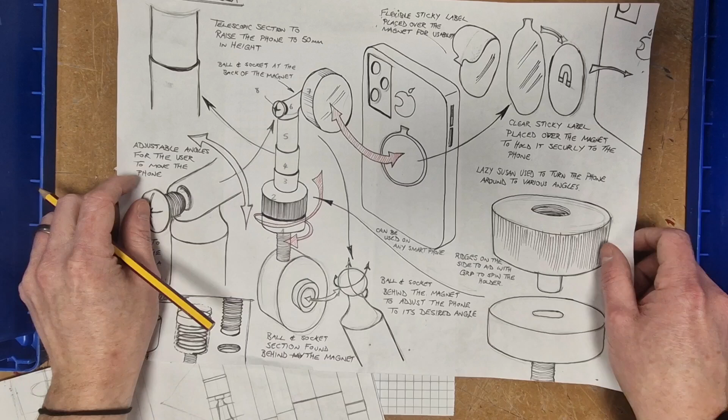It is a plan of what you are going to make, and it is done to a certain scale. The scale that we're going to be using is 1:1, which means that every 1 centimetre or 1 millimetre means 1 centimetre or 1 millimetre in real life. So for example, in year 10 and 11, we have been tasked with designing a phone holder that attaches to a rig. So here is a design of one of those phone holders.

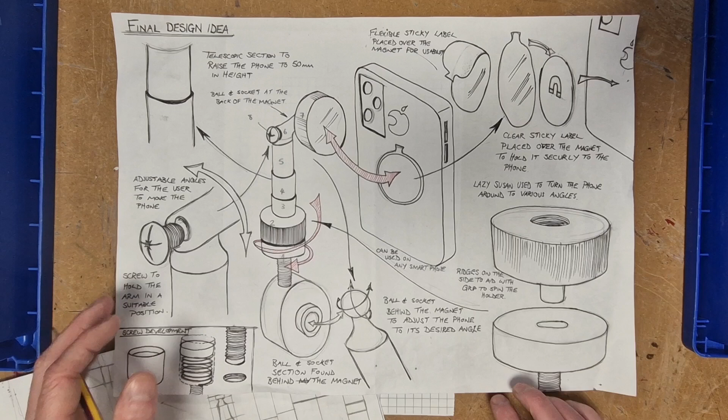So as you can see, here is the 3D. This is just a concept showing you exactly how it works. Now this is in isometric. So a 3D object, you can see absolutely everything, the front, the side, the back, and so on. Now an orthographic is a 3D sketch in a 2D format. So it shows you everything: the front, the top, the side, almost every part of the product, but in a 2D format. So as you can see here, this is 3D.

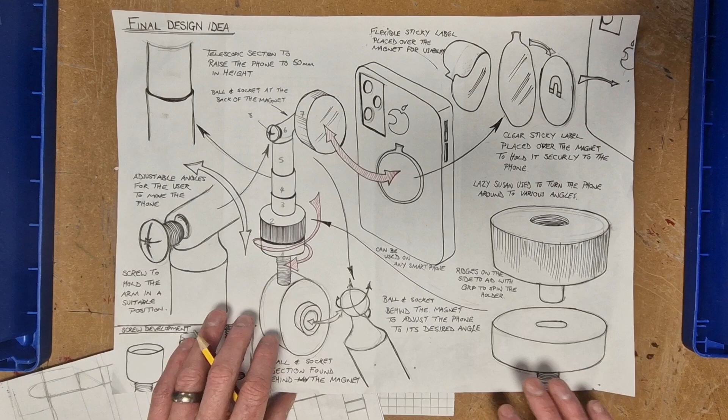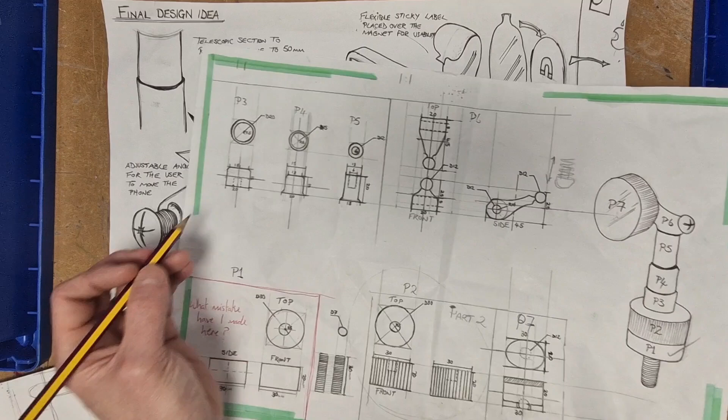What we then did was produce an orthographic drawing, or technical drawing as they are also known, for each part. So you can see here, this is part 1. Part 1 is just at the bottom here. This is part 2, and you can see all the lines are in. So this is the front, this is the top of that part, and that's the side there. Part 3, 4, and 5, which is the telescopic design that you see here. You've got 3, 4, 5, and this is it to its exact dimensions.

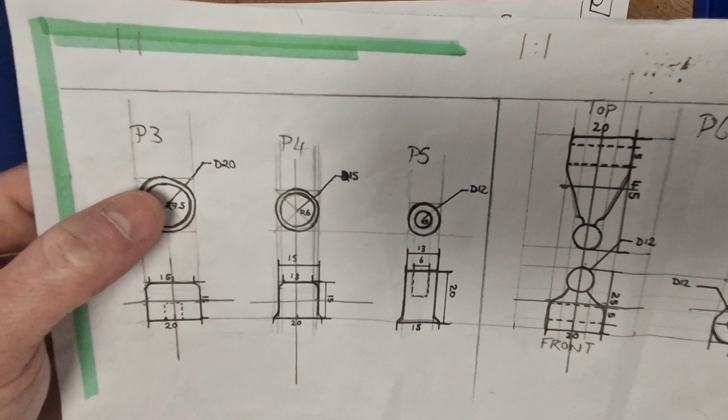Now, if I bring this a little bit closer, you can see that I have said that this is 20 millimeters wide, 15 millimeters high. This also has a hidden feature, which I'll talk about in a second. Now, from the top, it would look like a ring. So the diameter of that circle is 20, meaning that the radius is 10. And the diameter of the inside of this one is 15, therefore the radius is 7.5.

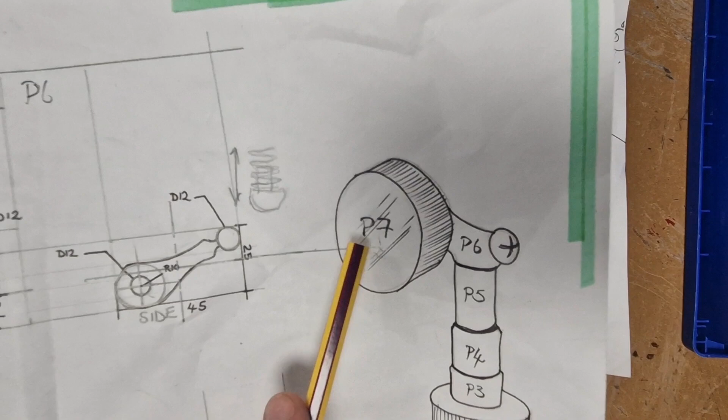The same thing has been done for this part here, which is part 6. There is a hidden feature behind this, and it's shown in its entirety there. That would then be delivered to a factory. The engineers would look at this and they will be able to build the product to the exact size that you want it to be, using the materials that you have stated for them to make it out of as well. Now, like I said earlier, we are only going to focus on the front side of our orthographic drawing.

So just to let you know what you're making your prototype clock out of, you are going to get a piece of 15 by 15 card. So this is 150 mil by 150 mil, and that's going to be the size of the back of your clock. So the main face is going to fit within this. So if it is 15 by 15, the first thing we need to do is draw a box anywhere on this grid at 15 by 15. Now, if you feel more comfortable drawing it in landscape, go ahead and do that. Whatever works for you. I'm going to do mine in portrait.

So using a ruler, and everybody should have a 15 centimeter ruler with them, all I'm going to do is mark the corner here, count up to 15, and 15 lands just on that line, and this is my starting point. So I'm going to draw the line across, following that guideline that I have here, like so, and that's my first part. I am then going to go 15 centimeters down, or 150 millimeters down, because that's what it is on the side. So I'm going to go to 150, and bring it right down to this line here.

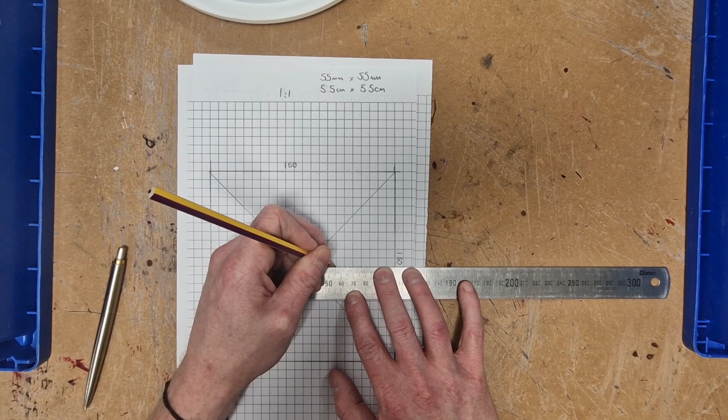So I'm going to place my ruler on 27.5 millimeters, which is just there. And I'm going to put a little line here. Then I'm going to take that to 55. Done. Okay, so now I know that's 27.5 millimeters, 27.5 millimeters. So if I use this ruler here, it'll show me 55 millimeters. I am then going to turn this around and do exactly the same here. And I'm going to go from 27.5 millimeters

to 55 there. And all I'm going to do now, nice and light, I'm not going to even bother measuring this. I'm just going to do nice and light lines all the way across those lines that I've just done. Like so. And there I have the exact size for that hidden feature. Now, as I said, you are not going to see it if we're doing the front. You do not see that mechanism at all.

So what we're going to do, instead of having a solid line, and I'm going to use a pen to show you this, just so it's clearer for you. Instead of having a solid line that shows this mechanism, we are going to have a dashed line. What that shows to the engineer is there is a hidden feature behind this clock face, this size. So I'm just following that line all the way around.

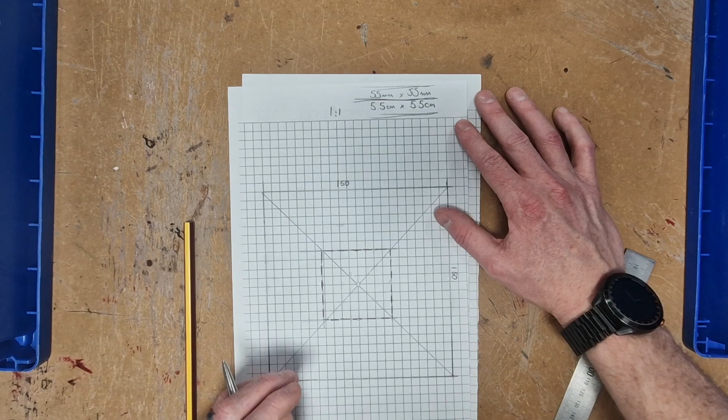Showing to the engineer that whatever's there has to be hidden. You will not see that at the front. So if your clock is smaller than that, you would see the mechanism. We need to cover that mechanism up. Right, the teacher's now going to pause the video and you are going to draw this. Now remember, it's 55 millimeters by 55 millimeters, or 5.5 by 5.5 centimeters. Do that now, please.